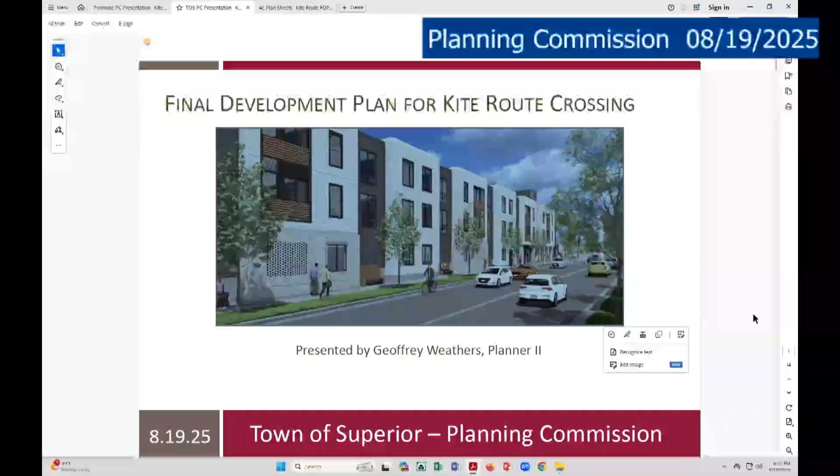The initial development in Discovery Office Park was zoned for commercial office park, and one building of that plan was constructed in 2003. In 2014, that PD was amended to allow for residential; the duplexes that now exist on Canary Lane were approved in 2018. Last year, the town approved an additional PD amendment to permit the use of affordable housing on Lot 21, the lot in question, as well as to refine certain development standards to facilitate the Kite Route Crossing project.

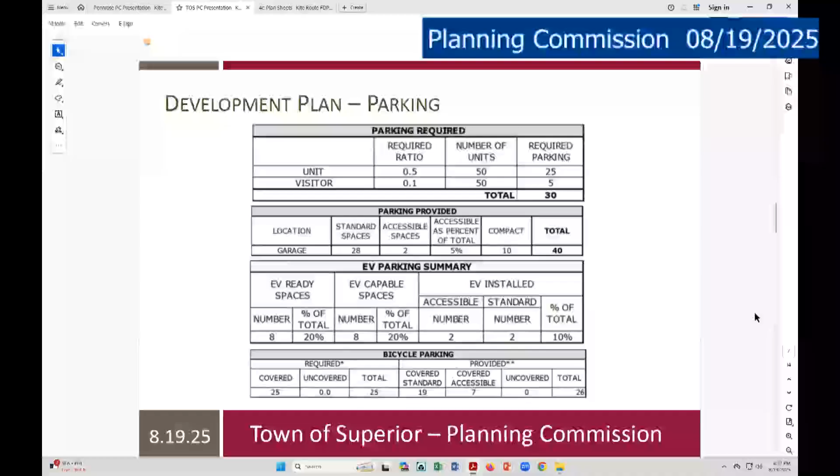For landscaping on the site, the goal established by the town and the applicant in the planned development agreement was to conserve water, stabilize the hillside, and avoid restrictions caused by tall vegetation. The landscape design meets the standards of the Superior Town Center design guidelines.

The landscaping integrates well with the existing landscaping adjacent to the building. It includes native grasses on the hillside to the south of the building, rock mulch, and a border area on the south side just before the building, and a shrub bed in the northeast corner of the building.

The existing landscaping on and adjacent to the property will be preserved or replaced in kind if damaged during construction.

Irrigation will be sourced from the town's non-potable water reuse line. The native grasses and shrubs will be irrigated regularly until established, then strictly as needed. The trees on the hillside will be permanently irrigated with a low volume, deep root bubbler system, and the shrubs and perennials adjacent to the building will receive water from a low volume drip system.

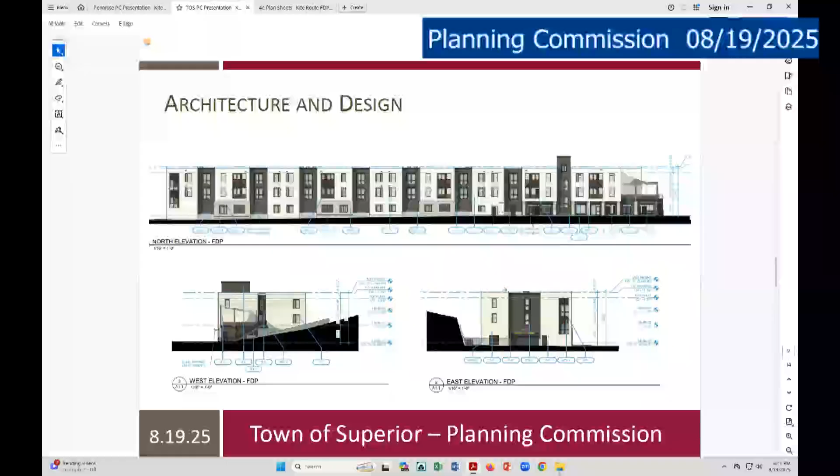For the parking garage, fenestrated walls with air intake grille shields hide the view of cars from pedestrians and building users, while using detailing at a human scale to make building frontages approachable.

The site includes a lot of amenities, including on-site property management, a multi-purpose common room, recreation room, fitness room, dog wash, and an outdoor sun deck on the second floor with views of the Flatirons to the west.

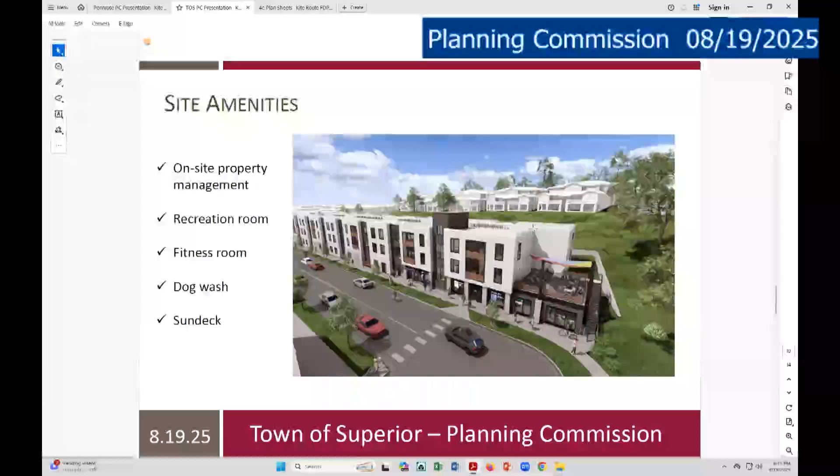They built into the FDP many sustainability standards that go above and beyond compliance with the 2021 IECC building codes, including green certifications, an all-electric system, indoor air quality measures, and water efficiency measures, as we discussed before.

They do have a couple of exception requests. One is an encroachment into the side setback on the northwest side. Amendment number 1 of the Discovery Office Park PD prohibits decks, patios, and architectural elements or similar items into the setbacks on residential lots, which I guess would include this one. An exception is requested for a 4.6 foot side setback encroachment for the outdoor staircase. The deck fits within the setback, it's just the staircase.

The staircase is for the private use of tenants. It will abut no structures on the adjacent lot on Block 8. Because the staircase will be gated for exclusive private use of tenants and no living space in the neighboring property will be adjacent to the staircase, staff finds that the potential negative impact of this exception is negligible and sees no objection to the approval of this exception request.

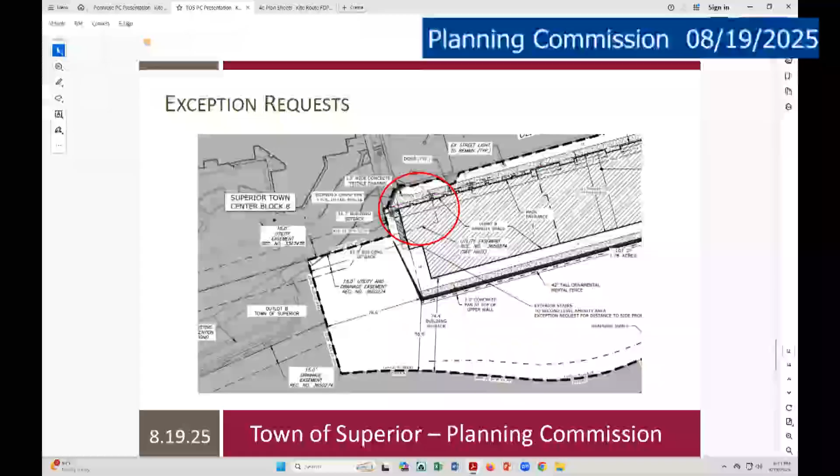If the Planning Commission finds the application meets the applicable criteria, staff has provided Resolution 5 approving the Discovery Office Park Final Development Plan Number 4, Lot 21, Block 1, Discovery Office Park Planned Development Number 2, with the condition that the applicants shall make minor technical and red line corrections to plans as identified by the town and directed by Town Board and Planning Commission.

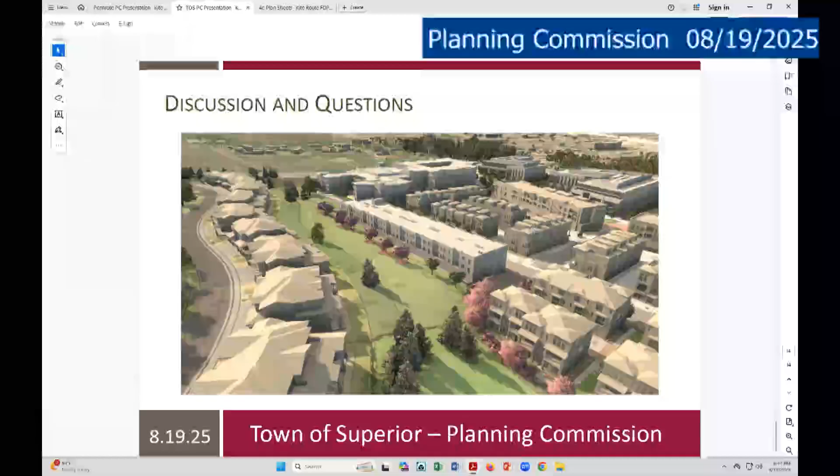We can open it up for discussion and questions, or we can take public comment and the next presentation first, however you guys do that. If anybody has any questions for Geoffrey, you can ask the questions, but we should hold discussion for later. Okay.

I had one with like one of your first slides that showed the property. Yeah, so it looks like there's a piece that's kind of getting orphaned on the right side of this property. Maybe like this? Yeah, what's going on there? Is that just undevelopable or?

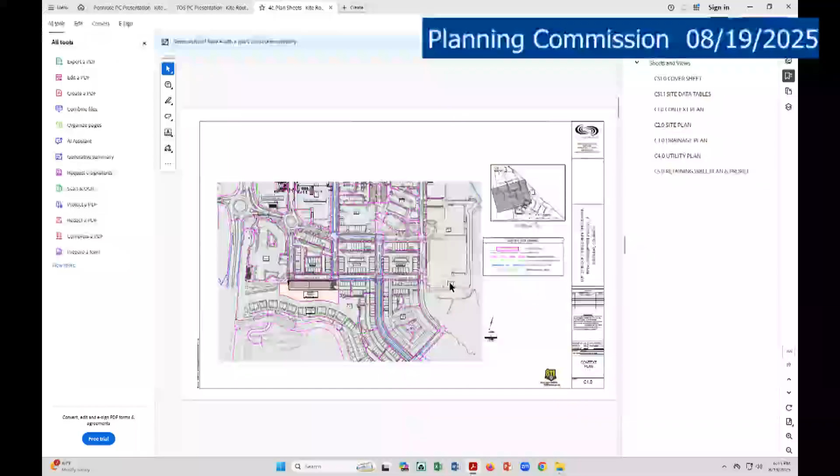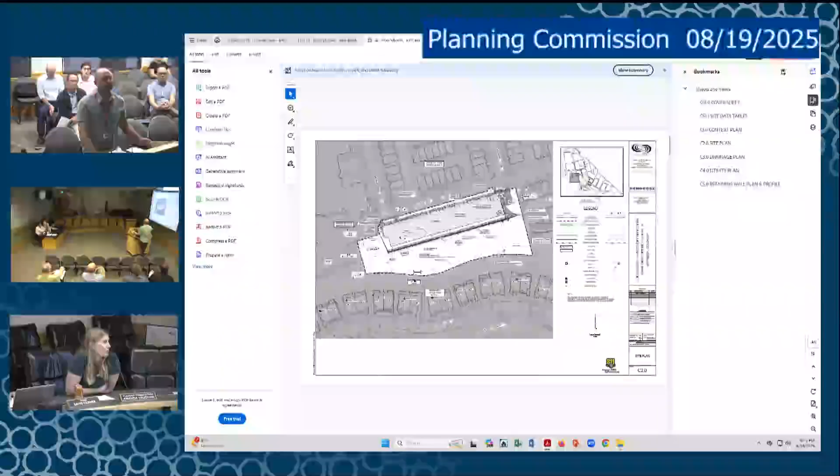That is a good question. You could see if the plan sheets... I'm not, yeah, it's a different property, so. I'm not sure if that belongs to the downtown or to Discovery Office Park. I could look into that, but I don't think that was considered because it was off the... I was just wondering if... like this was somehow making that land unusable or if that land was already unusable.

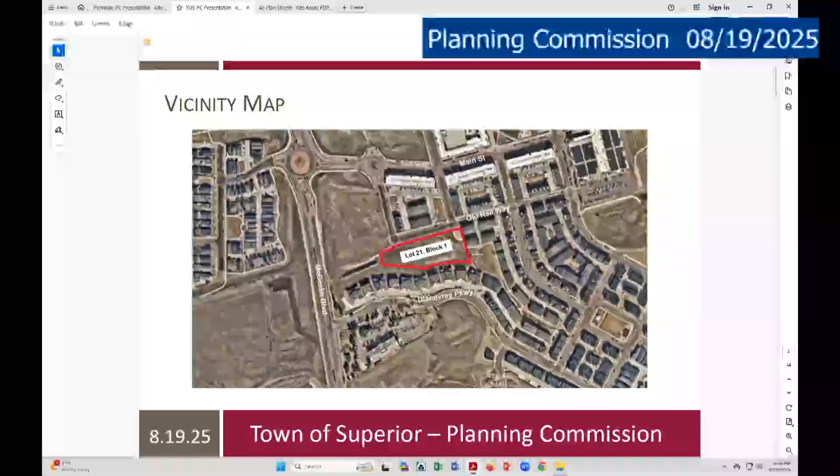To chime in just briefly, it looks like there's some pretty steep slopes in the 3D model there, so I think it's already intentionally unusable. Okay, I was wondering. I could see how that's designated and let you know, well, as soon as I sit down.

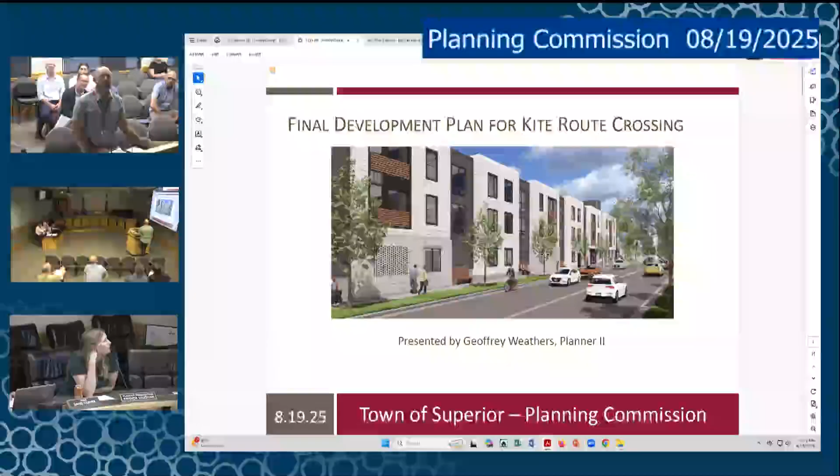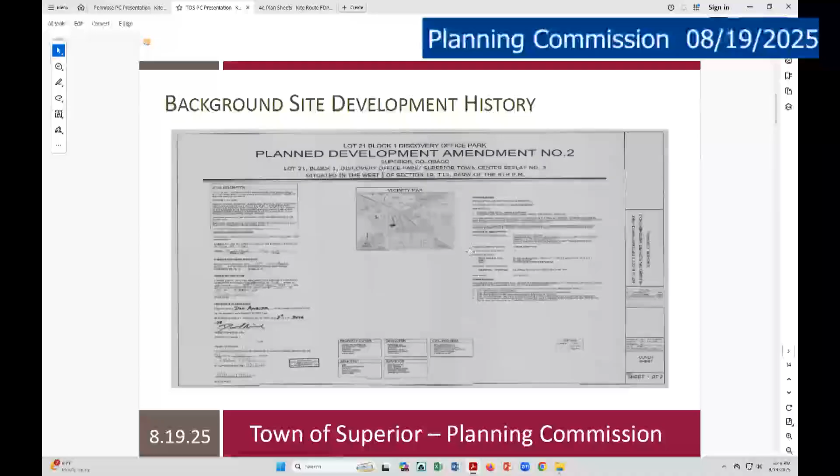David, can you go back to that previous slide? Previous this way, previous this way, with the property description. Property description, yeah. It was the other way. I think the site plan you were just showing there. The part of the site plan that I show is the landscape plan. Yeah, did you want to see this?

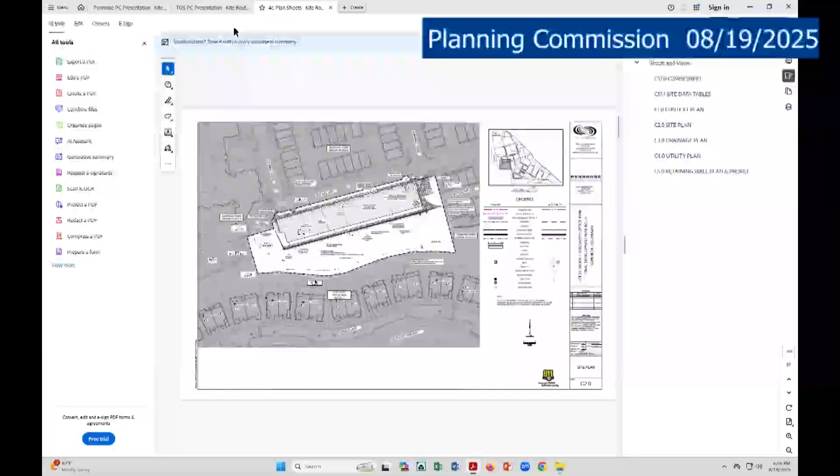It looks like the north property boundary is in two different locations on those two different slides. This slide, that slide, and this slide, that slide, because it looks like it's here. Look at the north property, so the boundary is a shorter line, and then the area of development that they'll be impacting with the development, so on this one, on this landscape plan, that's the area of the landscaping that's going to be done. So the property boundary on this plan here is shown just north of that dark line.

It's the smaller dotted line, so go up, right? One? Yep, that's the property line. But the landscaping plan is showing where the landscape plan is covering. So that's why those lines look different. That makes sense? So the smaller dashed line is the property line. Yes.

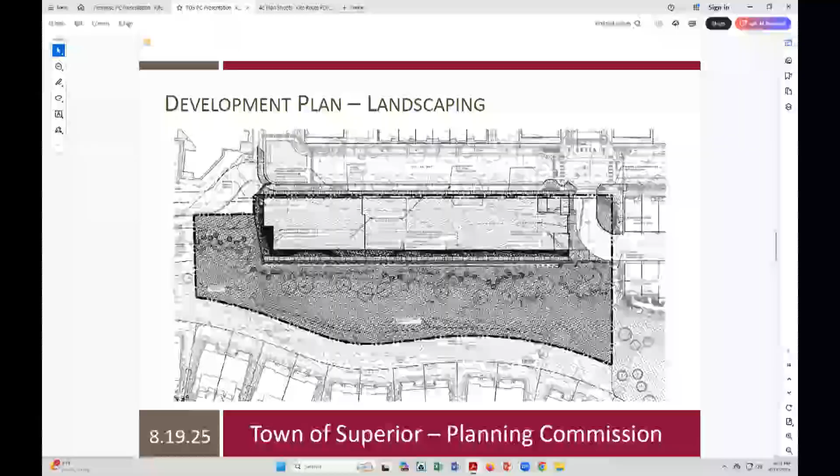And it's right on the flow line of the curb? No, it goes to the back, tree lawn I believe, back of sidewalk. Oh, it should go to the back of the sidewalk. So is the sidewalk in the public right-of-way, or is it on this property? Public right-of-way. See if there's a better...

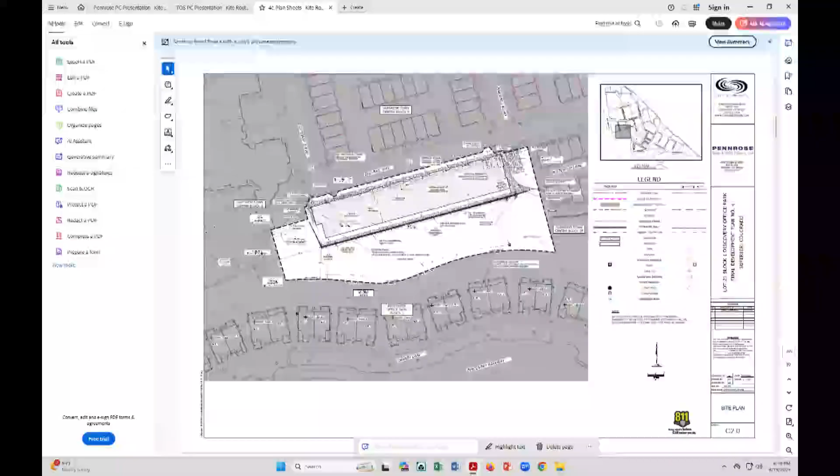The public right-of-way is the sidewalk. I'm not sure what the detail on this is, if that's the property line or the area of development. Is there a question associated with it? The property line is confusing. Yes, I don't disagree. The property line is the magenta line, the dashed magenta line right here. And you can tell because these come within a foot of the property line.

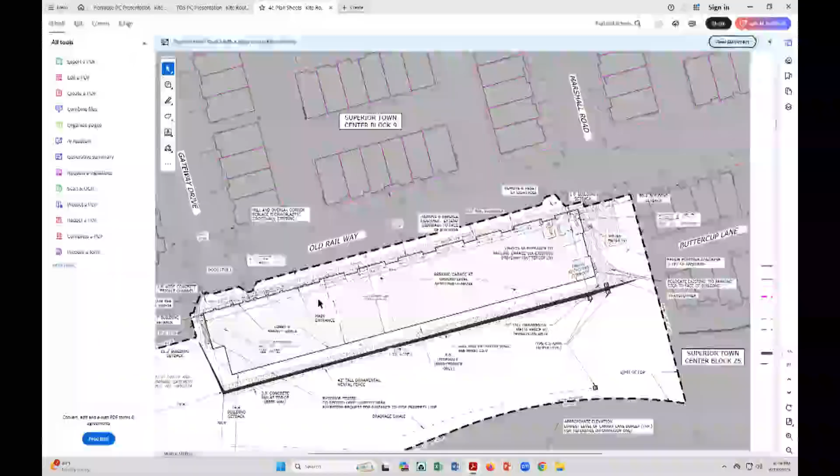And what is the front setback? The front setback is 0 to 3? Yeah, it's kind of 0 to 5 in a way. Because it's laid out like this, 70 to 80%, whatever that means, has to be 0 to 3, and that 20 to 30% has to be 3 to 5. But they basically all come within 3, so it satisfies this.

Okay, thank you. Yeah, sure. Ryan? Molly? Okay, Mike, do you have any questions?

Can you hear me? Oh, was that a question for me, David? I am having trouble hearing. Sorry, I was just asking if you had any questions for Geoffrey.

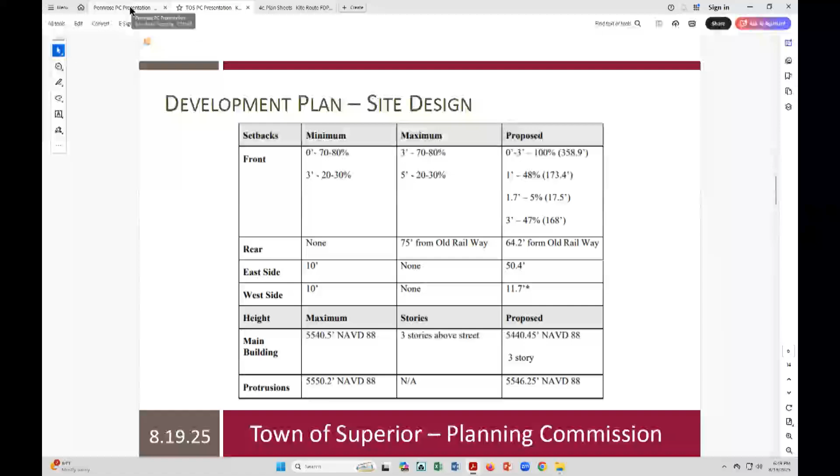No. Is there going to be a presentation by the applicant at all? Yes. Okay, that comes next, I'll wait for that. And Anne, do you have any questions for Geoffrey?

I'm not hearing anything, but I don't know if you're hearing me. Okay, are you hearing me now? Oh yes, we're hearing you now. Okay, I'll save my questions until after the presentation.

Okay, Jeffrey, thank you very much for your presentation. So I think the applicant has a presentation.

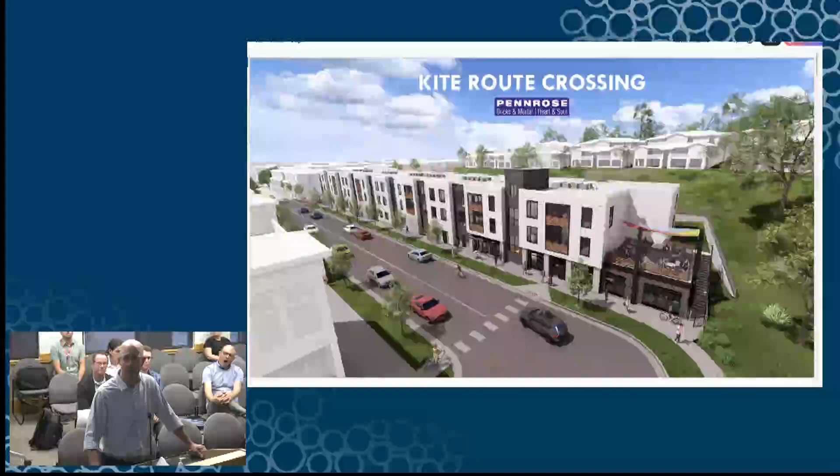Good evening, members of the Planning Commission. Thank you so much for making time for us here this evening. I also want to thank Jeffrey and Renee and the entire planning team here at the town. They've been nothing but great to work with, a great resource, a great sounding board, and great partners in this whole process. So my job is to quickly tee up Kite Route Crossing, the development we're very proud to be here representing, and then invite our great design team to talk through some of the details.

If you could tell us who you are, that would probably be a good place to start. Sure, I apologize. My name is Brad Weinig. I'm a developer with the Penrose team here in Denver. We'll cover the rest of the team in a slide in a moment. But I live in Denver and have been up here in front of you all and the town board a couple times for this project, and we're very thrilled to be at the stage that we are now.

So again, team, Brad Weinig here, representing Penrose. My colleague Shannon is not able to be here tonight. My colleague Michael Kimmelman is here behind us in the audience. We were the kind of three-headed monster of the Penrose Mountain Development team. Marcia Blunt heads up our property management team and will help me oversee operations of the property. Also on this slide, Andy Rockmore and Sean Jersnick from SAR, our great architects, Jim Brostowicz, who needs no introduction in front of this body, and Ben Blackburn, a principal with Innova. Innova is a company Penrose uses nationally on all our projects, from design through construction completion, to make sure we uphold the standards and qualities we expect as an organization, working hand in hand with our architect and engineering team, as well as our contractor in building the project.

Penrose, just real quickly, is a national organization, over 50 years old, with hundreds of developments and tens of thousands of units, the preponderance of which are income and/or rent restricted across the country. So we have a great depth of national strength, experience and capacity to undertake these developments. But I want to be clear that the folks working directly on this project all live somewhere between Denver and Boulder, and care very much about this community in our backyard. These are some examples of projects we have built in Denver or are building in Longmont.

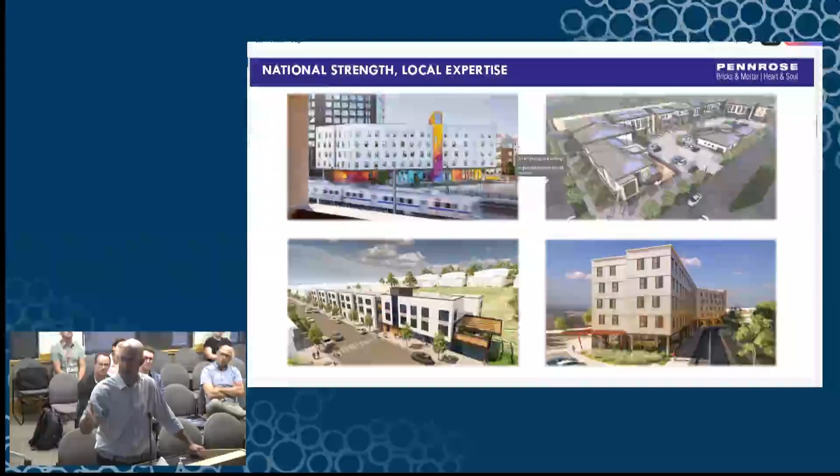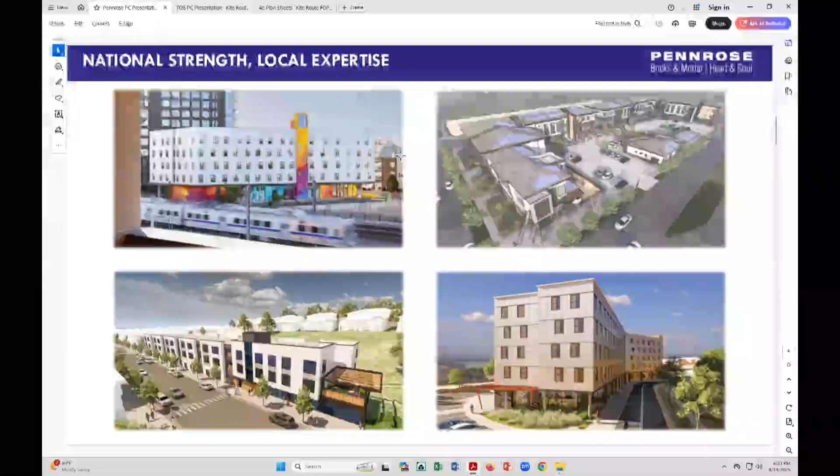Or hope to build here, as well as another project in Denver we are working on. So we rely on the strength of our national presence, but very much this project is driven by the local team. Jeffrey covered some of this, so I won't belabor it, but just to remind everybody, we were back in front of you guys about a year and a half ago in the spring to further refine the plan development for this project, to make sure we were clear on what we wanted to do and also be clear with the community about what we weren't going to do.

We knew coming into the project that there were some brand new, very lovely townhomes above us on Canary Lane, and we were very clear that we did not want to have a negative impact on the views that they enjoy, and we wanted to make sure that we fit in closely with the walkable, bikeable, very connected downtown Superior network. So we stood here and committed that we want to make sure we're helping you meet your affordability goals. This is also our goal, so we committed to affordable housing for seniors as the allowable use.

That is still very much the plan. We committed to a maximum building elevation to ensure that we did not impact views of residents behind us, and in fact fit in, no taller than the buildings across the street from us as well. So we want to make sure we fit very much into the community.

We talked about the parking ratio - affordable housing, especially affordable housing with age restrictions, tends to not use very much parking at all. We are providing more parking than what we are required to do here, but wanted to be clear about our parking ratio, as well as some of the setbacks that were just discussed. Again, making sure that we were going no further than 3 stories above, just to reiterate our intent to have a low impact physical development that fits squarely into downtown.

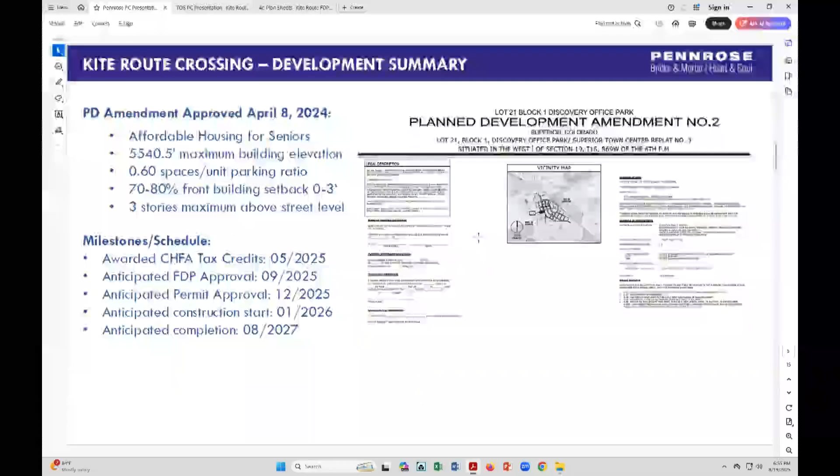In terms of milestones, where we've been since we were in front of you and where we hope to go - really our work has been trying to line up all of the difficult financing tools that we need to make this work. We were fortunate, thanks in no small part to the town's partnership, to receive an award of low-income housing tax credits from the Colorado Housing and Finance Authority in May of this year, which means that we have a real project that we can move forward with.

That really kicked us off on elevating the design again, picking up this FDP approval process. We are here in front of you this evening in hopes that you will recommend this project's FDP to the town council for approval next month, so that we can hope to work towards permits by the end of the year and start construction in the early part of 2026, hopefully completing the project in the summer of 2027.

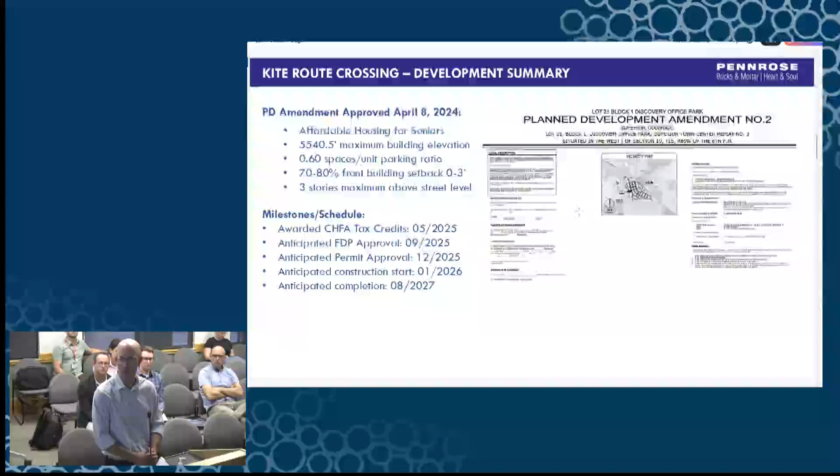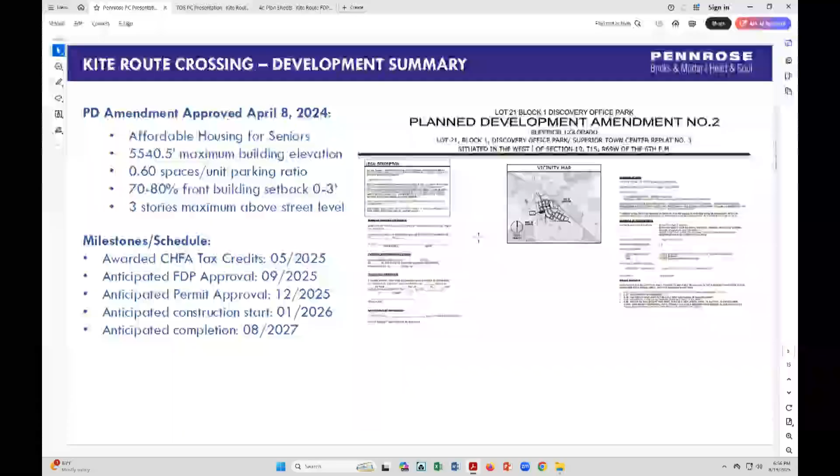Here's a picture of the plan development that we are a part of and that we amended with your help and approval last April, and it's the one against which we are asking you to review our FDP submittal.

And so with that, I think I will invite our intrepid designer, Andy Rockmore, to come up and talk a bit more about the key design objectives and what we've really worked hard on to make sure that we fit within the PD amendments and also the broader goals of the town. So Andy, come on up.

Hi, thank you. My name is Andy Rockmore. I'm an architect with Shears Adkins Rockmore Architects in Denver. These are just a few of the key objectives. There are certainly many, but really the first is, I hope, obvious, and what all architects should do to your incredibly successful fabric that you have created here in the town center. We seek to contribute to it, in other words, fit in rather than stand out.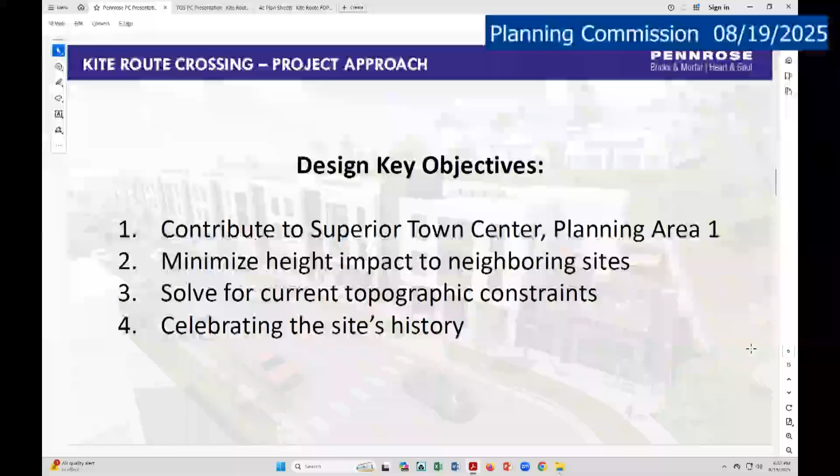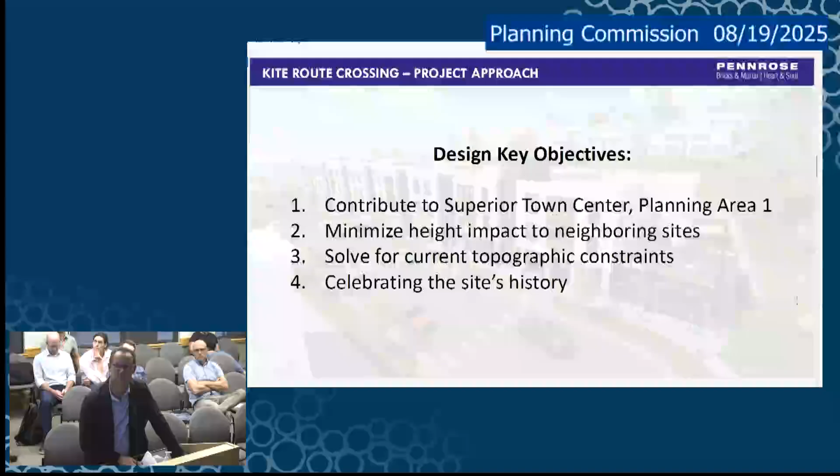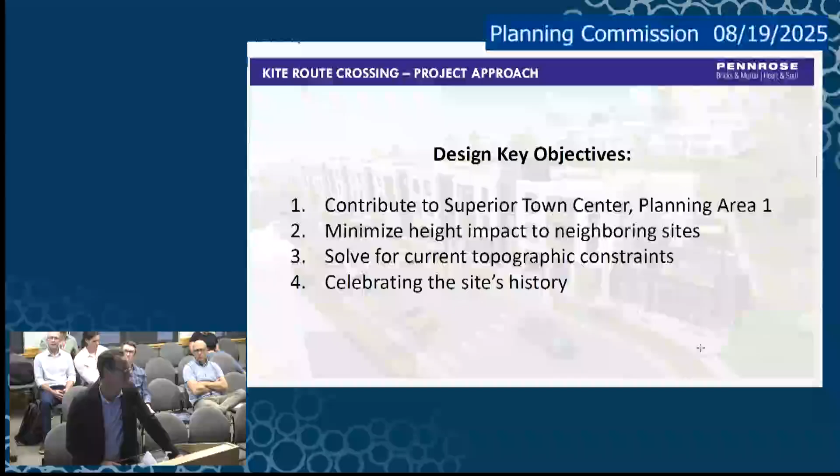The next two really describe what makes this site unique and also incredibly challenging. We are trying to, as Brad stated, lay low, if you will, because of the considerable views of the townhomes above. The current topographic constraints is a fancy way of saying the hill - we are digging into a hill, and that's difficult.

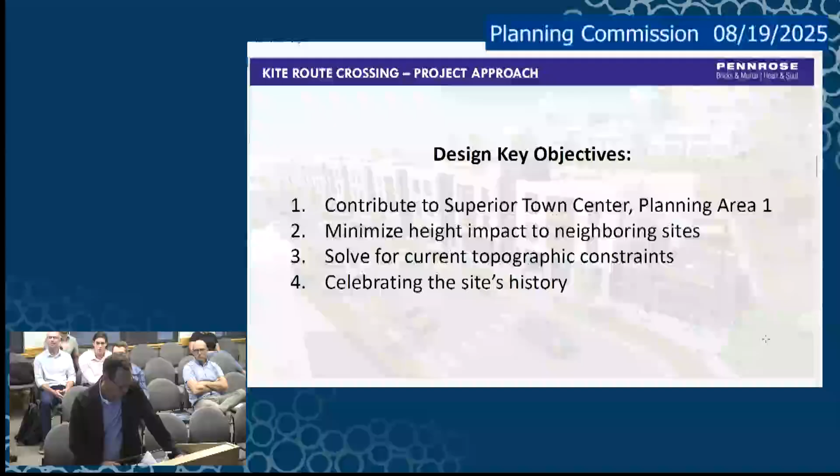But through all of this, we wish to also represent the site's heritage, the site's history, and it plays an interesting part in... what am I? Sorry, you gotta use the keypad. Just in the drawer below. Oh, really? Thank you.

Great, so for those of you who don't know, the Old Rail Way, which is the road that we're building on, is the exact route that used to be the Kite Route - the interurban railroad that traveled around these parts from 1908 to 1930. It was actually an electric rail; they were far ahead of their time. It traveled these routes and was nicknamed the Kite Route because of the shape that it created. This has been a great inspiration, and we always seek for the places that we make to teach and reflect the history of the site. It's a pretty incredible place in your town.

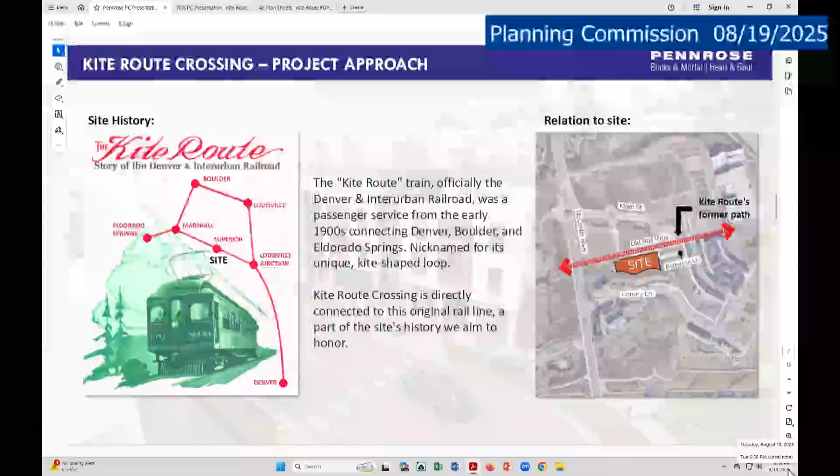And it's been tough, it's been a challenge, I will tell you. But it's what we've really tried to do. Again, it's a long and low building, but I'll describe some of the strategies and moves we've made to achieve this.

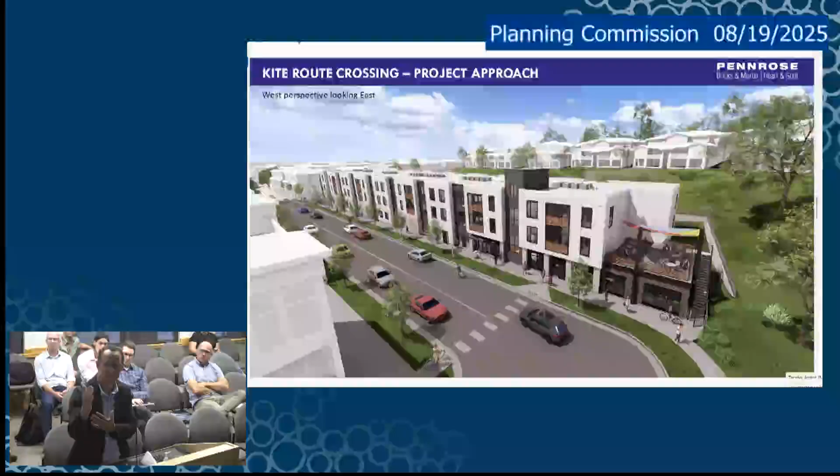So we intentionally placed the entry here on this end and opened it up as much as possible with significant transparency to show all of the common and public places beyond, including the amenity deck for all residents and people who work here. And we're showing that stair that Jeffrey talked about, which will allow greater connection, greater connectivity. We could live without it.

The project still works without it, but we think it's far more successful if those who use it, especially in such a relatively short building—only 3 stories—have multiple ways to get up and down and out of the building. That always helps catalyze the activity, including the stair.

You can see the stair tower here, filling the stairs with abundant light, because they become common spaces in 3-story buildings, every bit as much as the corridors and the streetscape.

Just a quick view of the plan. You can see those 40 parking spaces with EV on the ground floor, and then to the left by Gateway Drive, a whole host of rooms—fitness, meeting rooms, club rooms, kitchens, the leasing center, person at the desk as you move in, packages and bikes—all reside on this first story.

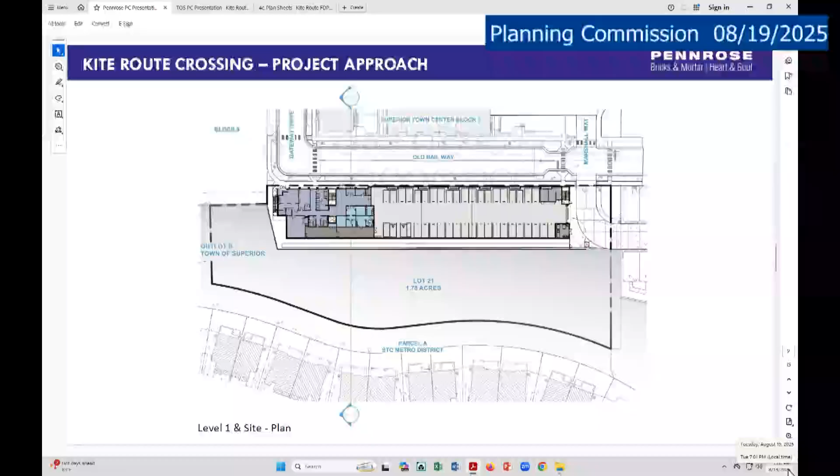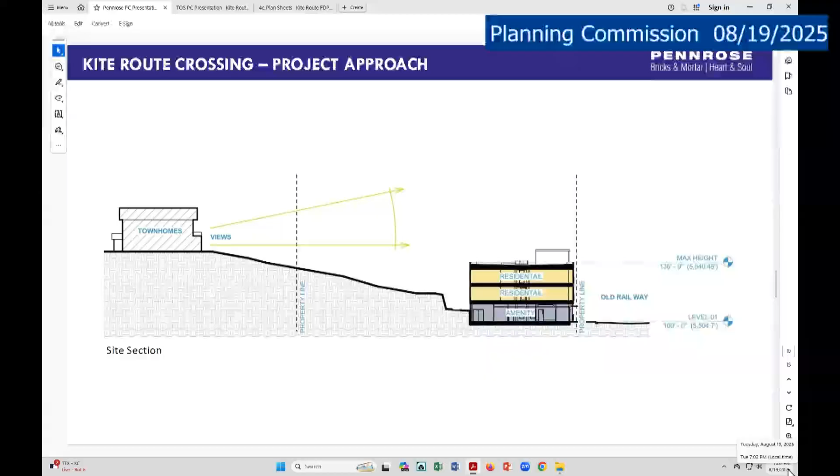This section through our site shows well what we've managed to achieve: a 3-story building in 35 feet 9 inches, with parking and amenity on the first floor, 2 floors of residential above, and above that the townhomes. So what happens when you do that is this.

You see over the top of this building—we've also worked very carefully with a whole host of engineers to carefully locate all of the mechanical equipment necessary on the roof. It is, in large part, yet another facade on this building. People look down upon it, so we need to be careful about it, and we have been.

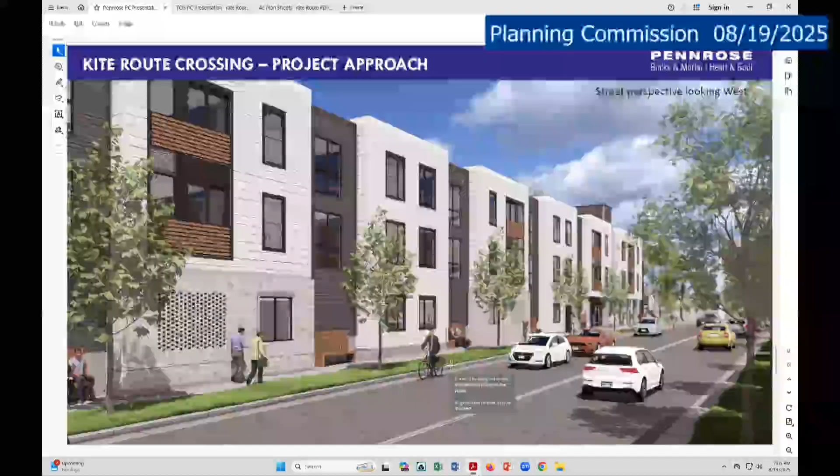And then down the street, you can see the main entry. This is another shot. We're using the masonry, which creates the substantial base along these townhome elements, and then it kind of fades away into these columns here at the end.

These are all of the more common activities, public rooms, the fitness and meeting rooms that I spoke of earlier. The stair that we've been talking about here has a gate at the end so it's secure, and then the common amenity deck. As a play with the kite route theme, we're also creating shade on this western exposure with these sails, which are in the form of kites.

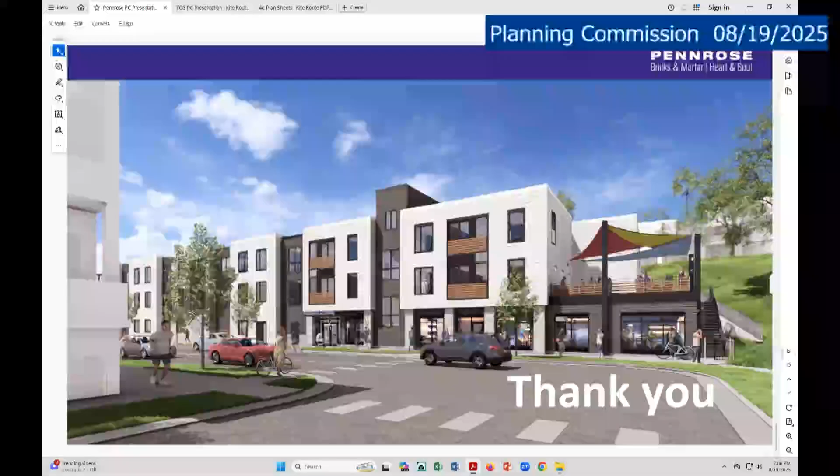This is not an interior design presentation, but we're pulling some of that attitude, that playfulness, into the interior design as well. And then finally, this is, as we said, the main view down Gateway Drive. You can just see the door here, the main entry, and a small canopy above it.

We are eager to answer any questions you might have. Thank you so much.

David, can I add something? We have Chase on here. He can do the presentation for a flyover, so you can see this development in the greater downtown area. So if we want to have him share his images and do some flyover, and then direct him, and then maybe take questions, because I want to allow him to present and then move on. Great idea. Okay, thank you, Chase.

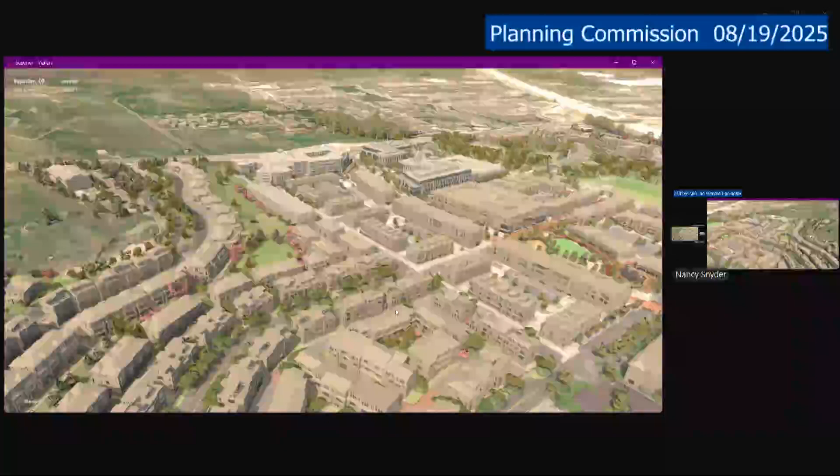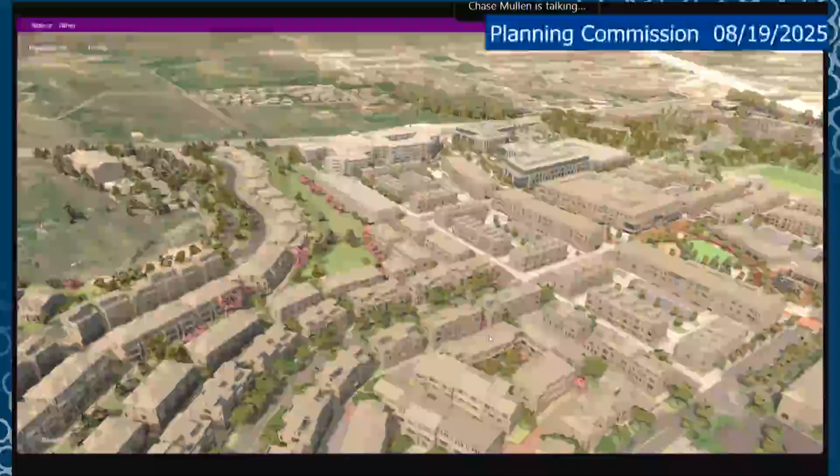Hold on, I gotta change the view, and the remote is not right here, so don't start yet. Good evening, everyone. While we wait here just a moment, I'll do kind of a general overview and go through some of the views that I saw that were asked to be addressed, and make sure that we have good alignment on those. Then I'll open it up to Planning Commission to direct me wherever you'd like. So just let me know when we're ready, Renee. We are ready. Thank you.

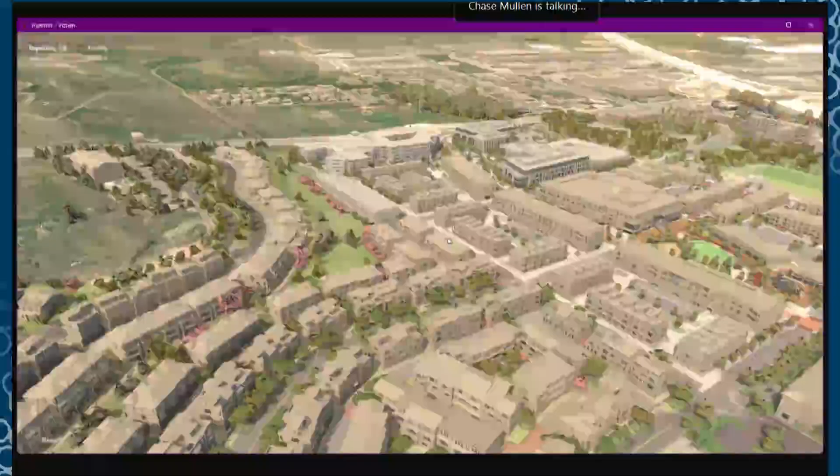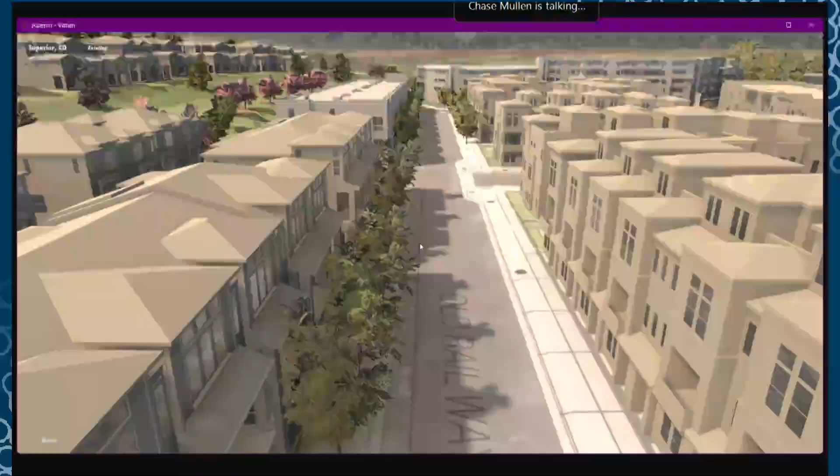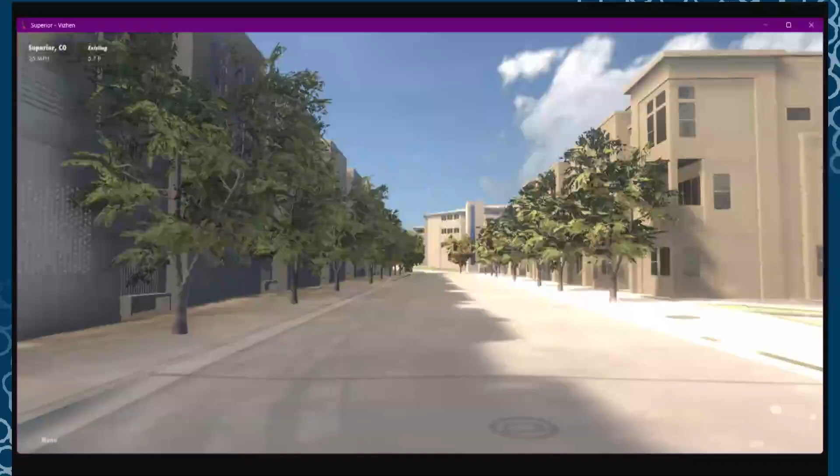All right, so here we are, Superior. Gonna fly in here, now we're looking down old railway, and we're just about to land. Right here is the Kite Route Crossing, just a slightly different tan there on the ground here. We're going to turn the corner, and I'll come back at it here up this gateway, I believe. Sorry, a little jerky, a little rusty, haven't been in front of the board here in a little while. I'll move our sun here just a little bit, let's make it that way.

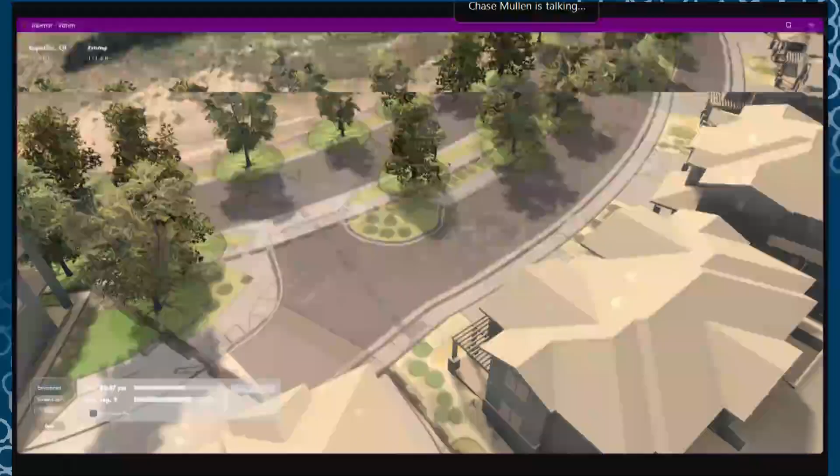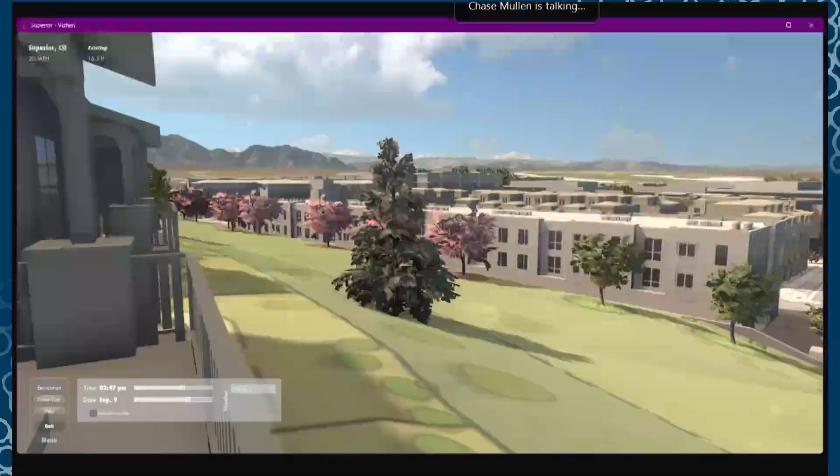I'm gonna look up here from, this is Canary, I believe, is that right? So maybe just drop down here to some of these kind of upper story windows, go down here to a deck or two. I'm kind of just going to slide against the back side of these. Oops, stuck.

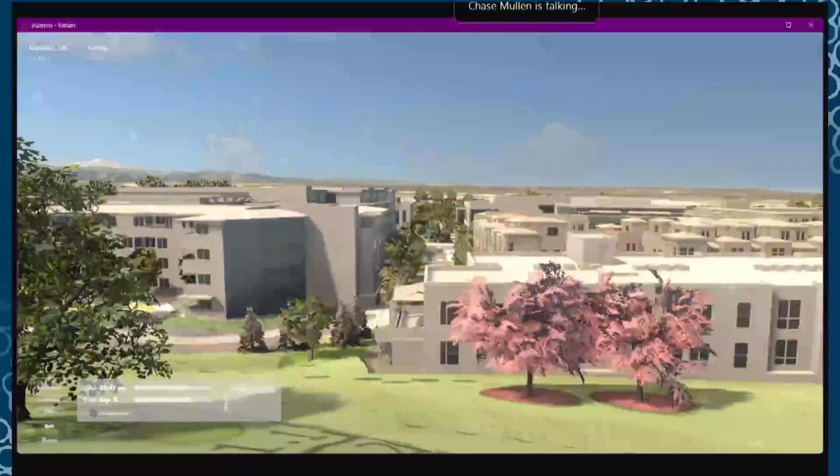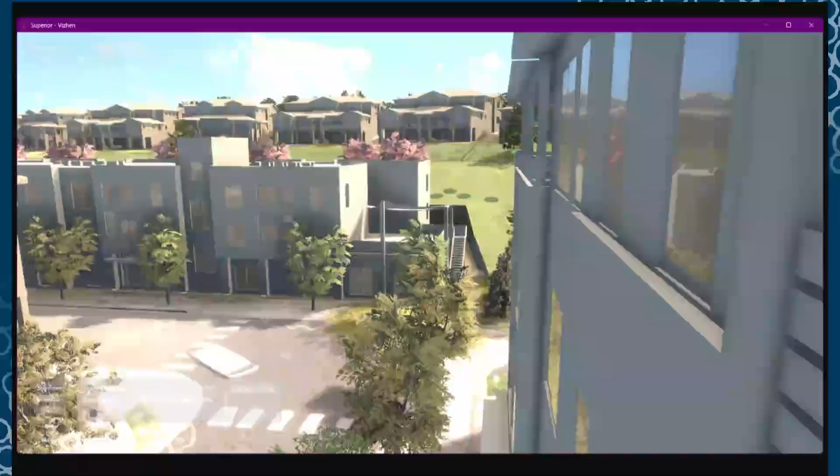And then maybe we'll go over here, turn the corner, the deck maybe. Upper story just across the street. Another rooftop deck. Another rooftop deck. Upper story window. Just back the other way, maybe. Those are kind of some of the key ones that I had seen before. Is there any other specific places you'd like me to dive into or spend a little more time at?

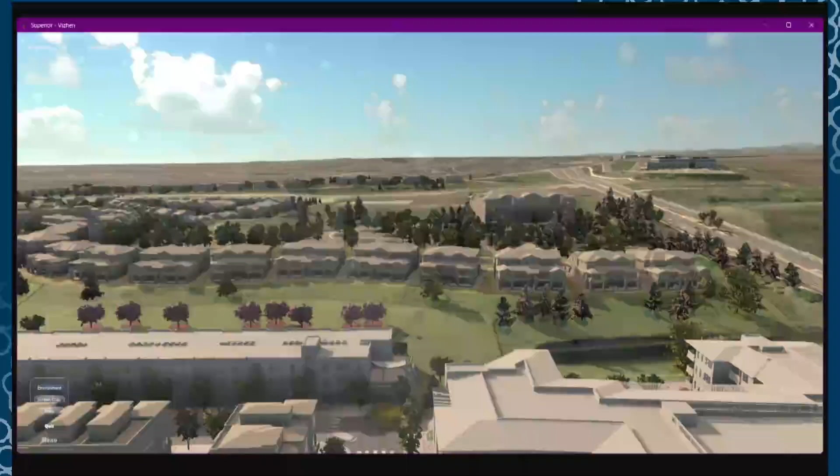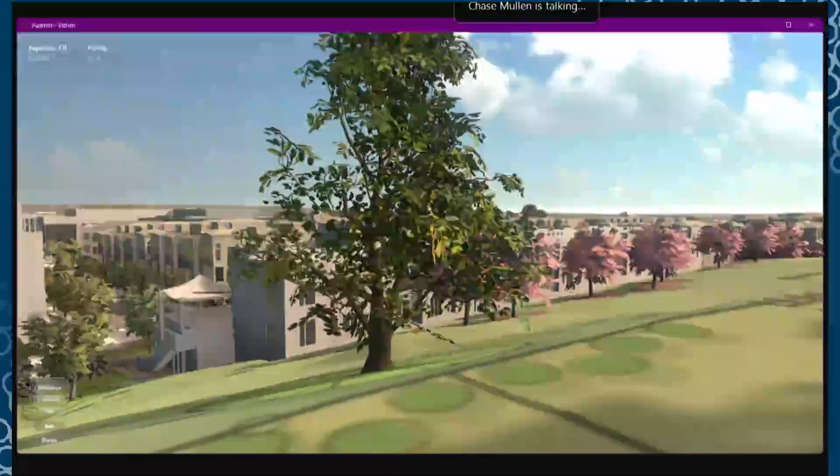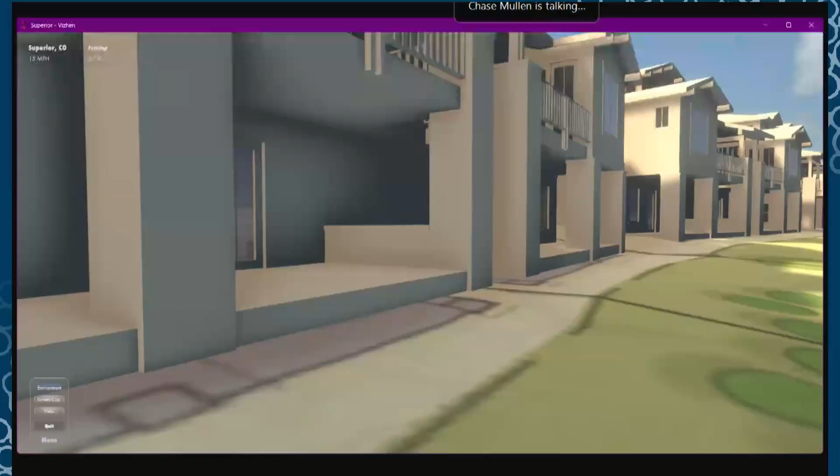Chase, if you're at ground level behind the townhomes on Canary Way, what do you see from there? Yeah, good one. So let's go down here to right here. I can toggle the trees just for a second. I realize that's not exactly an apples to apples, but oops, got to slow down here, turbo. So I'll walk, I'll kind of just start walking horizontally here and stay at kind of the ground level. I'm trying to remember, I think there are some patios on Canary Way that are basically coming out at this level, aren't there? Yeah, exactly right. Yeah, so we're... oops, bumped into another support.

What's the building that we're looking at over to the left there? Is that the new Yes development that's under construction? Correct.

Then we start to round the corner here and lose sight of it as we continue along those porches off of Canary Way.

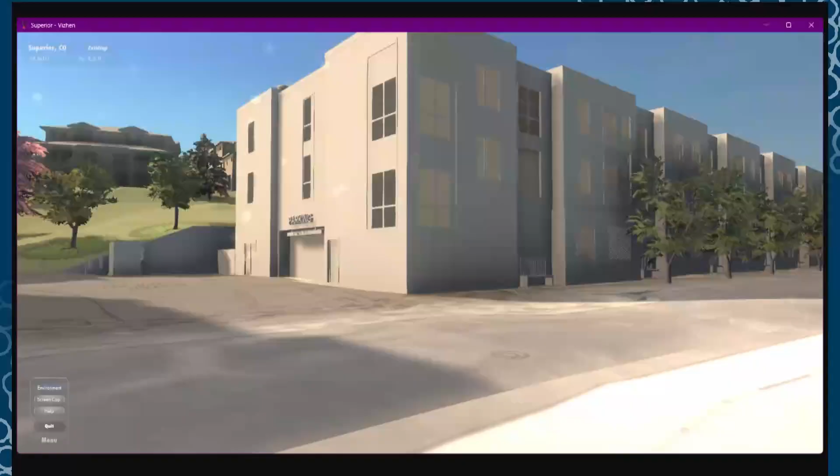Chase, can you put us on the deck of this kite crossing building looking west? The deck over here at this end, yeah. Let's see if I can squish myself in there. There we go. Toggle the trees for a second. Get some good Flatirons.

The height plane is pretty irrelevant here in this location. We're a couple hundred feet below it.

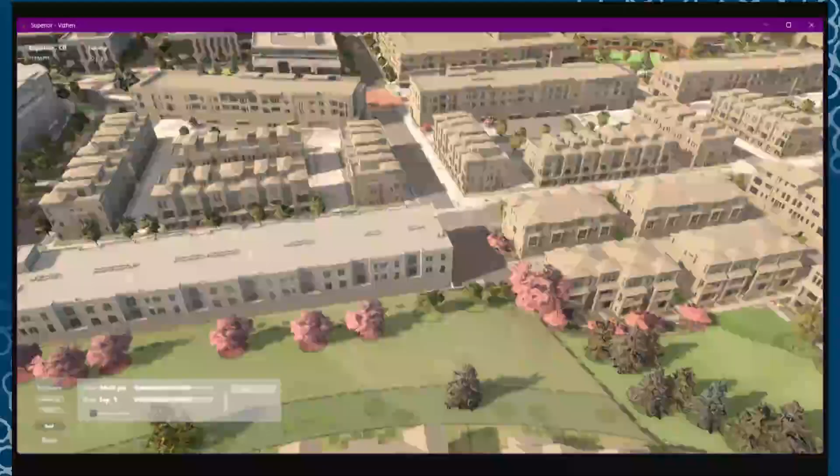Does anybody have any other particular views that they'd like to ask Chase for? David, Amanda, Ryan, Lonnie, good, thanks. Thanks, Chase.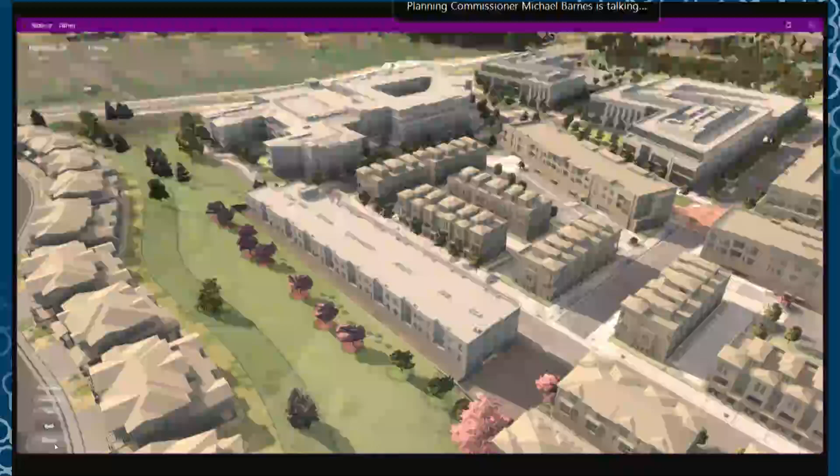Mike, do you or Anne have anything that you'd like to look at in particular? For me, David? Sorry, say again. Oh, this is Mike, David. I don't have any questions for Chase. All right, well, as always, you're very welcome and thank you. Thank you.

Okay, Andy, does anybody have any questions for Andy about his presentation? Andy...

50 units, correct. 1 and 2 bedroom, yes, very few 2 bedrooms, but yes. And size of the 1 bedrooms approximately in square feet? Oh, I'm going to turn to Sean so I don't get it mixed up. Sean is an architect here working on the project as well. About 650 square feet for the one beds. 650 square feet for the 1 bedrooms.

And how many 2 bedrooms approximately? Six? Six, 6 twos, yep. Do you want the size of those? Yeah, that'd be great. Those are thousands, 1,000 square feet. Great, thank you. Yes.

I was really impressed by your history of this kite route. Is there any plan to put in some sort of sign or something explaining some of that? You got it, yes. There's a large wall just as you walk in the front doors, and we're going to fill that wall top to bottom with the map, the historic map of Kite Route, and tell that story. So it really is part of the experience.

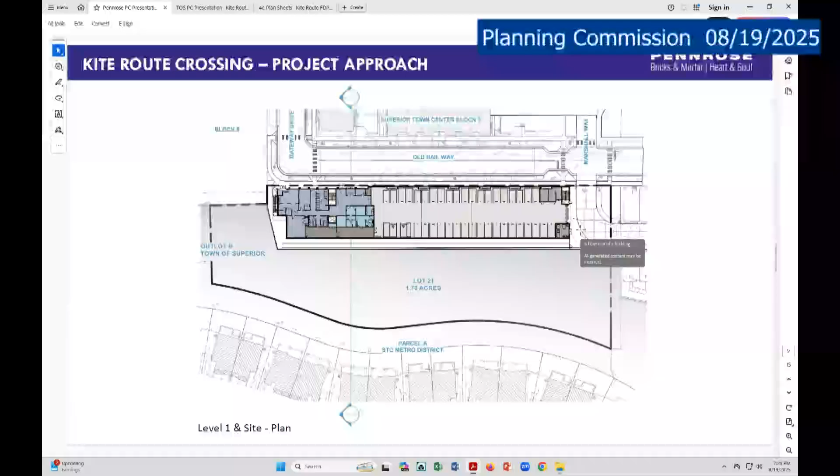Okay, and finally, on the roof, there's air conditioning compressor units visible. Correct. Do those need to be screened in any way? Those are going to be visible from the Canary Road or the Canary Lane townhomes?

It's a good question. As far as I know, they're not required to be screened because they're far enough set back from the front facade. However, you're right, they are visible for those who live above the project.

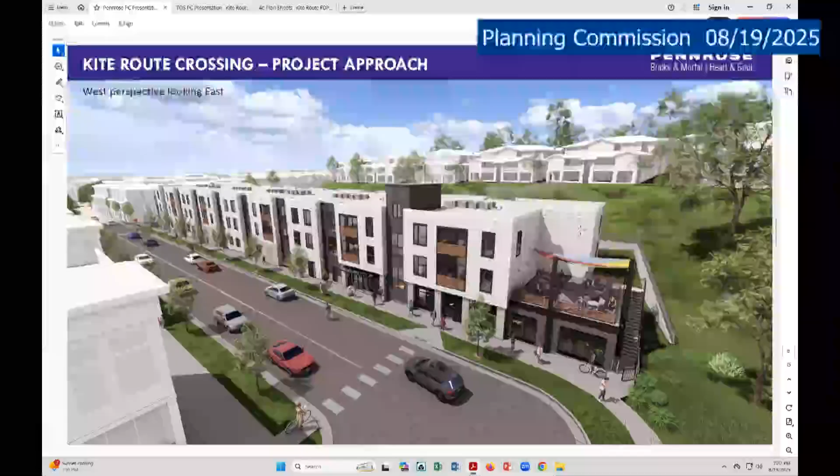So to partially answer, he's right, there's no requirement to screen them because of where they're located on the top of the building. And if you added screens, then you'd be seeing screens, and those would be higher than the roof line. So it's a catch-22 as to whether you want screens all the way along to block these from view, but then create height across that whole top of the building. Or you want to see these units, we didn't ask for screening because it's not required. Sure, I can imagine it could be objectionable to those neighbors, but if there's no requirement, I don't think we can ask you to do it.

Am I right in assuming, Renee, that if there was a screen to block the view from above of the air conditioning unit, the screen would have to be so high that the sight line of it might block the unit, but we would then see a 10-foot screen or some mega screen.

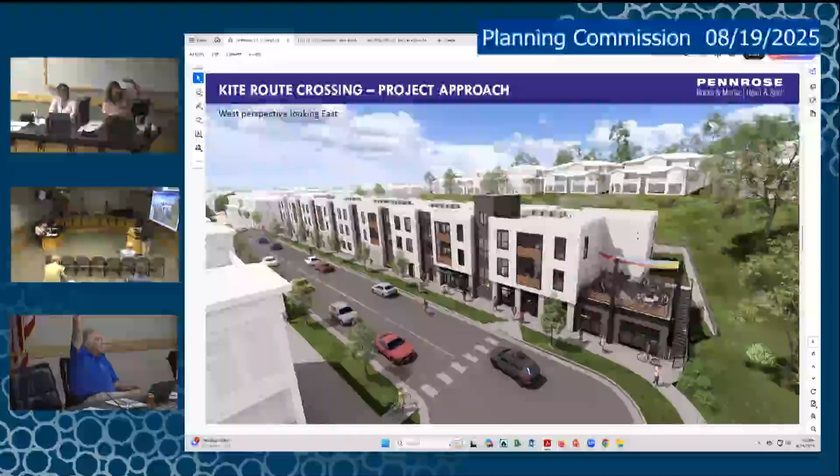Well, there would be more height on the building across the entirety of that building if you built it, especially if you're trying to enclose them in some way. I don't even know if you built a screen on that south side, whether those would still be visible from Canary. They're up really high, on a height difference, probably up another 25 feet just to the first level, not even the second level.

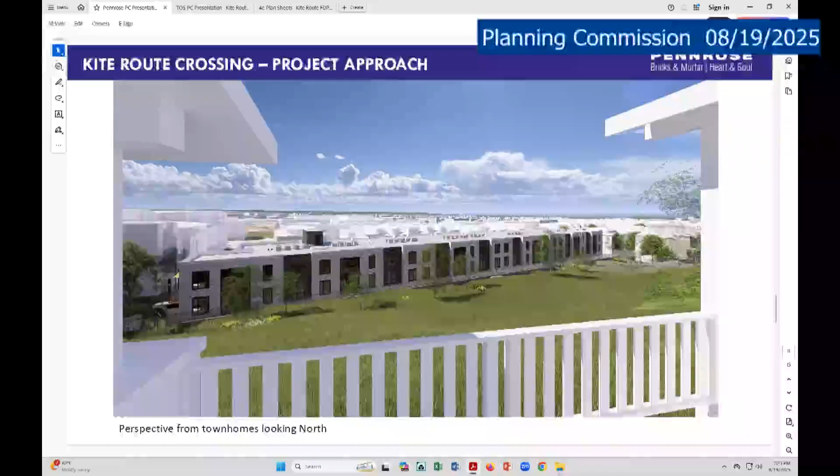Yeah, I mean, it's an interesting debate, but you're blocking one thing by creating another block. Okay, thank you very much.

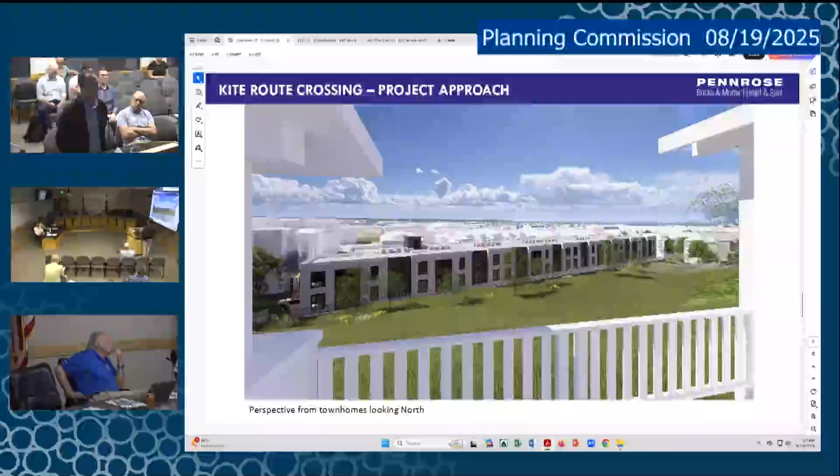Amanda? Asked mine. Sorry? I already asked mine. Oh, okay, I'm good. Ryan? My only question was about the screening on the roof, and I think we just discussed it enough. Mike?

Yes, thanks, David. Let me see if I can get my video on here so you can see a face with the voice. So yeah, I think it looks like a great project, and in terms of appearance, given the site constraints, I think it just looks great. Kudos to you guys on that, and I love all the little touches you put in there.

My only comment is really on the irrigation system and the landscaping on the hillside. On the irrigation system, I noticed on the drawings there's a booster pump on the east side of the building, and I assume that's added to increase the pressure to get the water up to the top of the hill. Two concerns with that: first, booster pumps can be pretty noisy, and it's over on the east side, so I wouldn't want to create any noise nuisance for the residents already there.

So the best thing would be to figure out a way to get rid of the booster pump. If that really isn't possible, then the enclosure for the booster pump should at least have some soundproofing or insulation to make sure the decibels don't get too high. Also, that is a temporary system, and as was noted, it's only going to be used to establish the native grass on the hillside, which makes perfect sense.

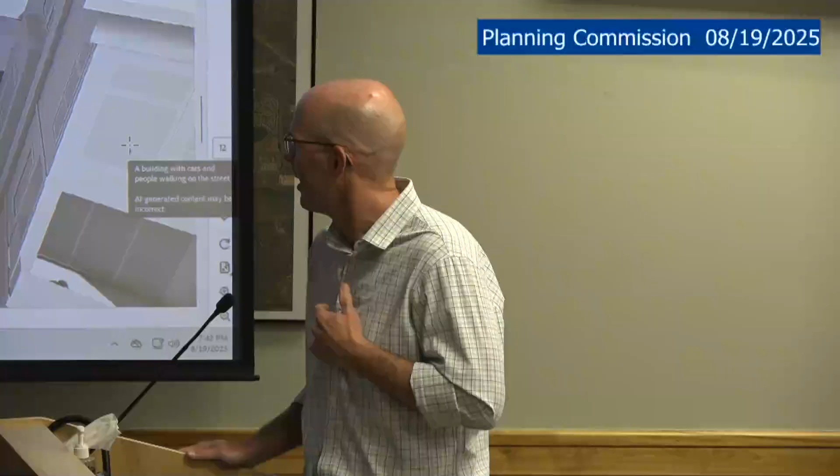In terms of the maintenance, this is the property that we will own, and so we will be responsible for maintaining it. We've already made some initial outreach into the organizations that do some of the maintenance in the area. It sounds like maybe it's not up to standard, so maybe we should look elsewhere, but we will ensure that we are good neighbors and maintain our property up to standards. Certainly, the last thing we want to do is create a fire hazard. We're very, very conscious of the recent history of this town and this community, and don't want to exacerbate it. We've taken a lot of very careful steps to ensure that resiliency, stabilization, flood mitigation, and fire mitigation is baked into our design here.

The fence around the retaining wall, is that shown? It's shown right there on that. Use the mouse maybe for folks, it's hard to see. Yeah, but it'll go all the way to the end. Okay, good. Should look like the retaining wall that's to the west of the property line. Okay, Michael, do you want to repeat that?

My name is Michael Kimmelman, an associate developer with Pennrose.

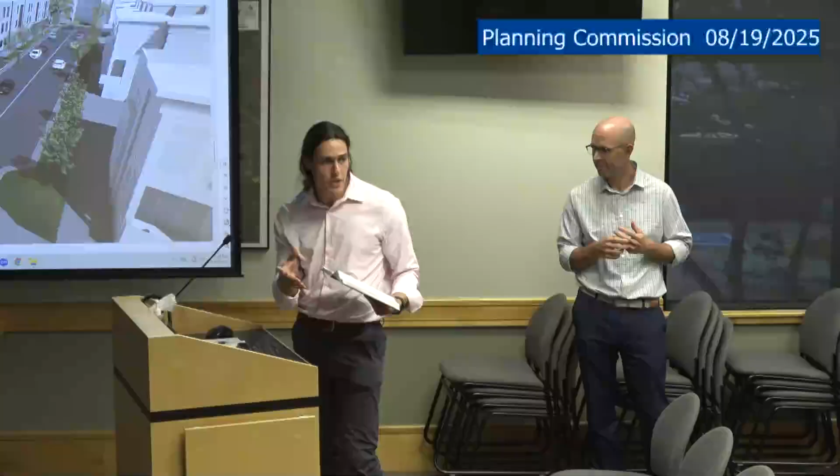Just to answer that, with the fence and retaining wall, there is a retaining wall to the west of the property already that exists. The fence we will have will, in its design and functionality, be very similar to that. So from a safety perspective, and if you're concerned about height, I think that's a good barometer moving forward. But you're right, it's a fall hazard. We need to be conscious of that.

Was that all of them, or was there another one in there? The dust. Oh, the dust.

Certainly construction projects are a mess. We have lots of standards we have to live by, including during construction, with our GC, and we can commit to working with them to ensure they are communicating to everybody around what's happening over the next week, 2 weeks, 3 weeks, and employing every tool to ensure dust mitigation. We expect them to clean up trash every day after they're done, like any good construction crew should. The crew we're likely to work with is a company called ICOTA. I believe they've developed other nearby projects in this area and are proud of their work. We're here for a long time, we can't sell it in 2 years and get out. So we're your neighbors for a long time, and we want to be good neighbors in how we maintain the property and how we build it during the process.